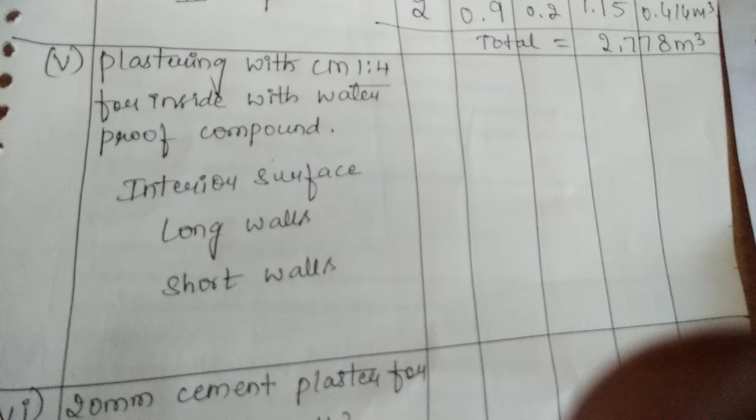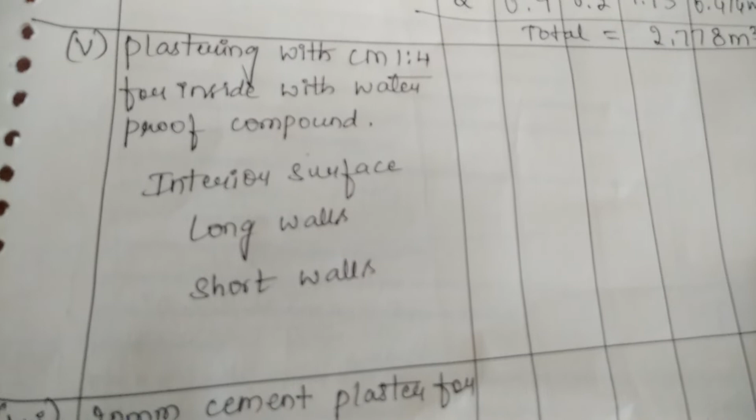Moving to the next item of work. The name is plastering with cement mortar 1:4 for inside with waterproof compound. Here we need to do the plastering for the inside portion of the tank.

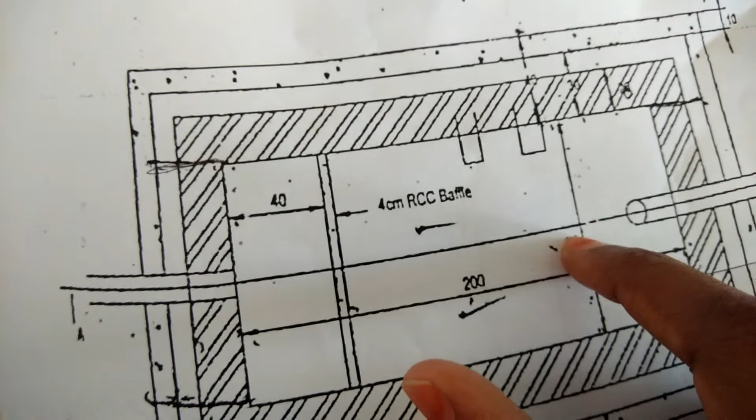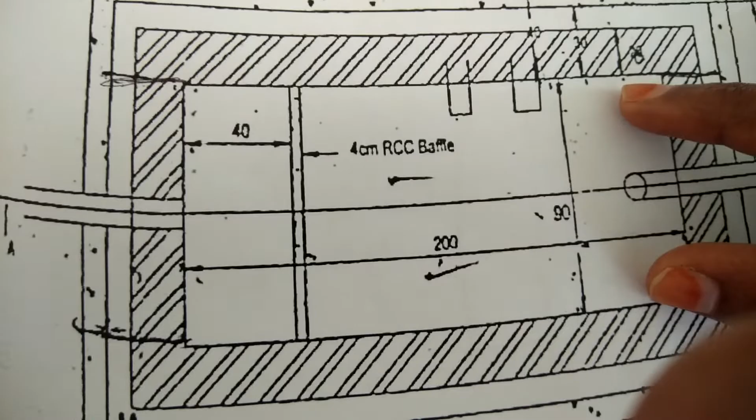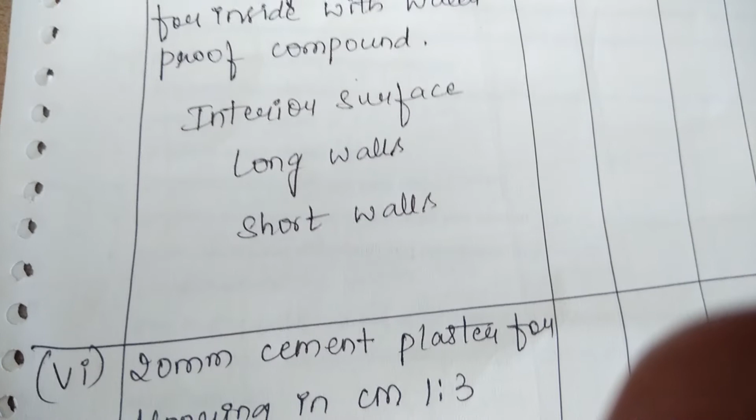The inside portion can be seen in the plan. The inside rectangle is where the plastering has to be done. This rectangle consists of two larger sides and two shorter sides. The horizontal portion represents the higher dimension, while the vertical portion represents the lower dimension. Hence the higher dimension wall is the long wall, and the shorter dimension wall is the short wall. There are two long walls in the horizontal direction.

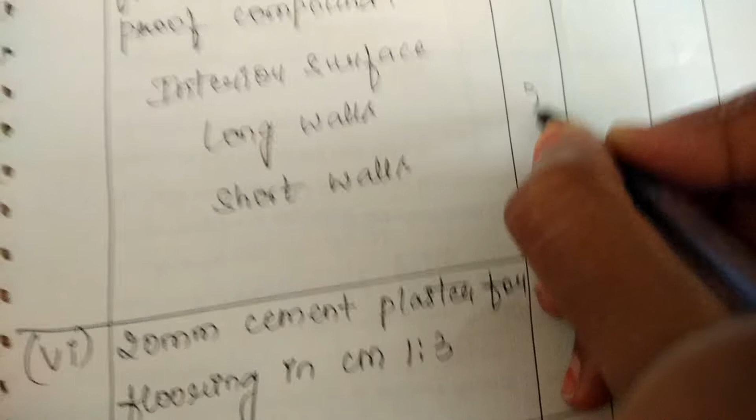Let us write the number as 2. Similarly, there are two vertical walls acting in the vertical direction, which are of shorter dimension. Hence you write the number of short walls as 2.

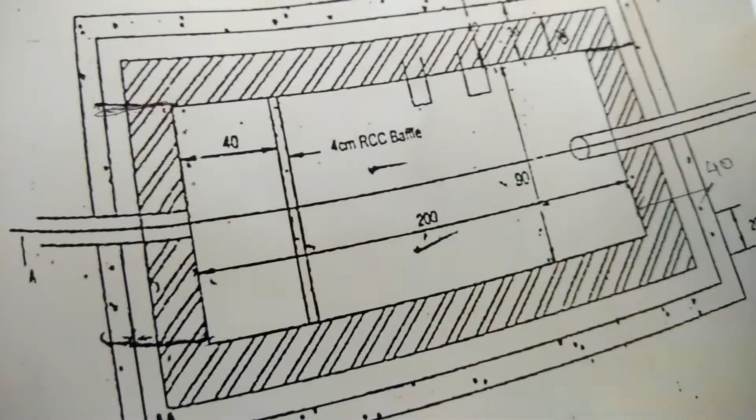Then to find the length of the long wall, since we are working on the inner surface, the inner dimension itself becomes the length. The inner dimension is 200 centimeters in the horizontal direction, so this becomes the length for the long wall, that is 2 meters.

For the short wall, the inner dimension becomes the length. The dimension is 90 centimeters. Dividing 90 by 100 gives 0.9. So the length of the short wall in meters is 0.9.

Then let us write the width. Here width represents the thickness of the plastering. Since there is a very small thickness for the plastering portion, the width of the wall will not be considered. We only do the plastering for the length and the height of the wall.

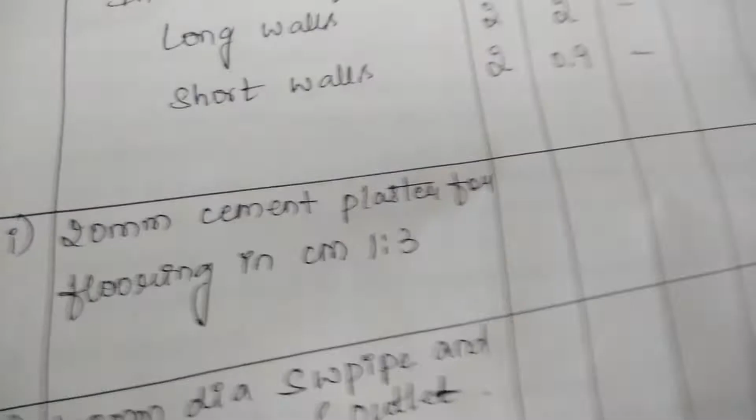Now let us find the height. The height of the wall is up to this point. The total height is 30 plus 140. Adding 30 with 140 gives a value of 170 centimeters. Dividing 170 by 100 gives 1.7. For both walls, the height is the same, that is 1.7 meters.

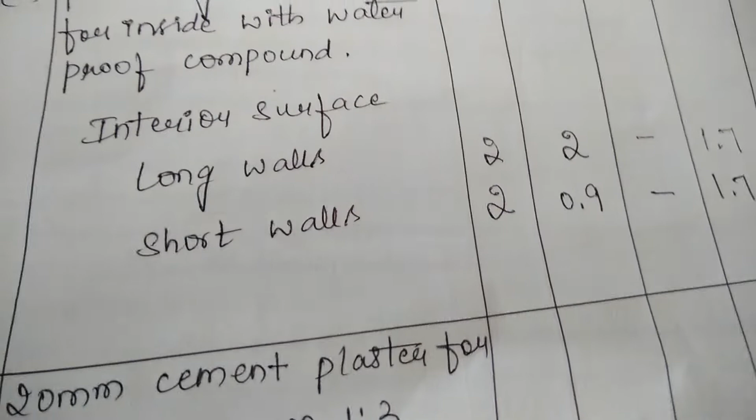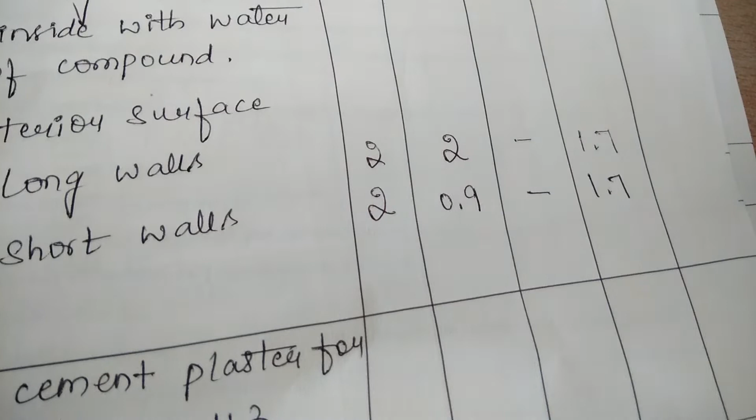Now this gives you all the dimensions. To find the final quantity, multiply the first three values. Multiplying 2 with 2 with 1.7, I get a value of 6.8. That gives the quantity for the long wall.

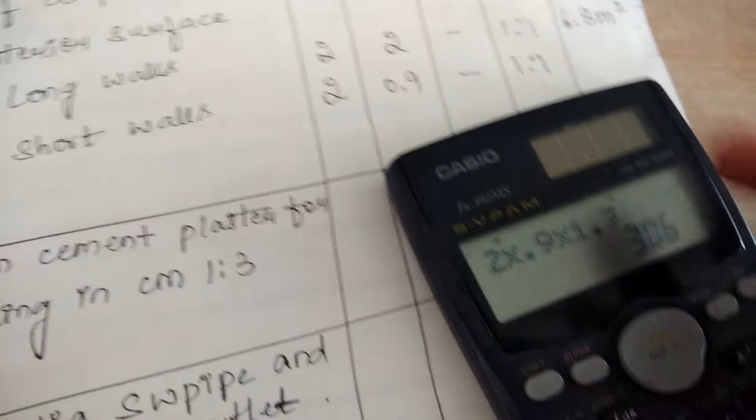Then to find the quantity for the short wall, multiply the second set of three values: 2 into 0.9 into 1.7. Multiplying these gives 3.06, expressed in meter square. So now I got the quantity for the short wall.

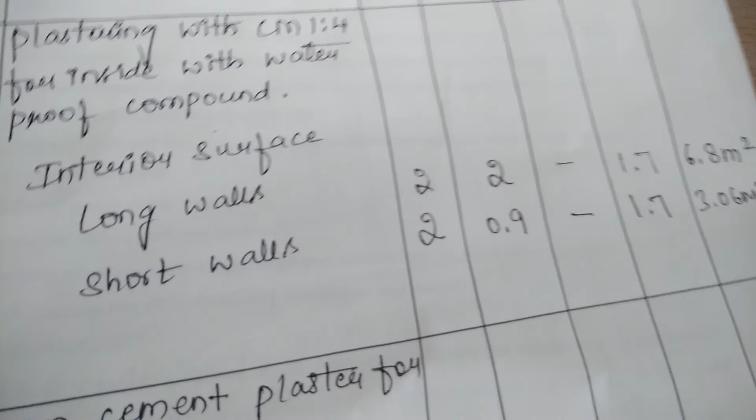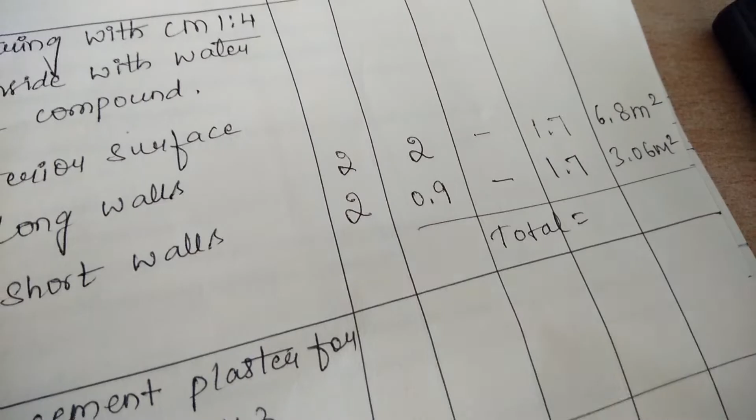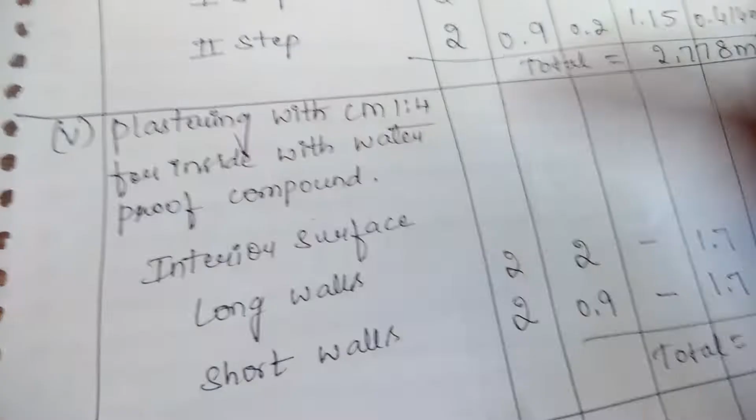Once I have both quantities, to find the final quantity I need to add them. Adding 6.8 with 3.06 gives a value of 9.86. So 9.86 meter square gives the final quantity for the plastering with cement mortar 1:4. That completes the fifth item of work.

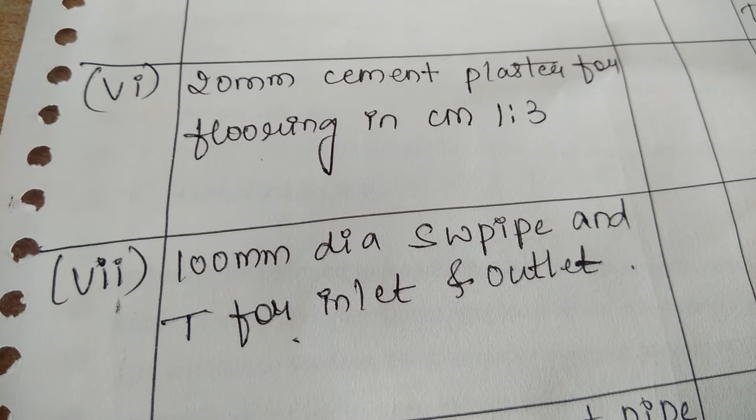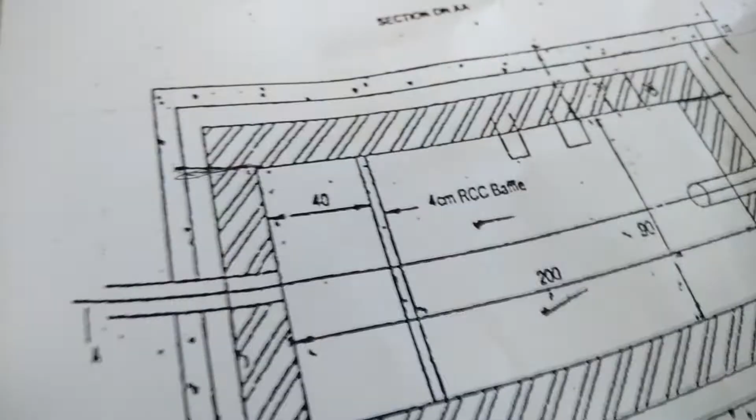Now moving to the next, the sixth work is 20 mm cement plastering for the flooring in cement mortar 1:3. Here the plastering has to be done for the floor, meaning we consider the inner rectangle. This will become the length and this side will become the width.

There is no depth within the floor because the floor thickness is very small. Hence we only get the length and the width. The length will be the higher dimension and the width the lower dimension. The higher dimension is 200 centimeters, which becomes the length of the flooring, that is 2 meters.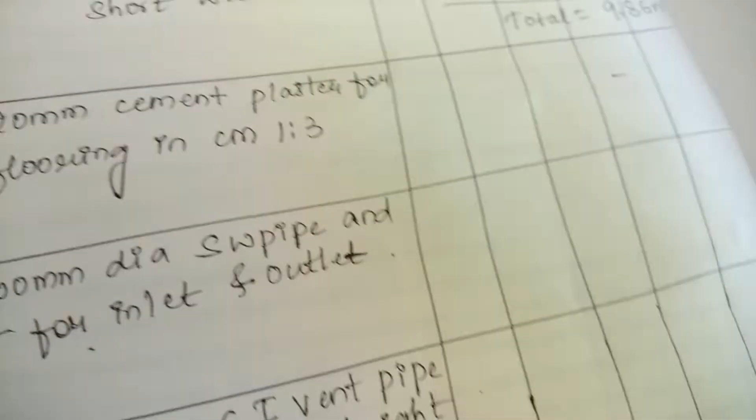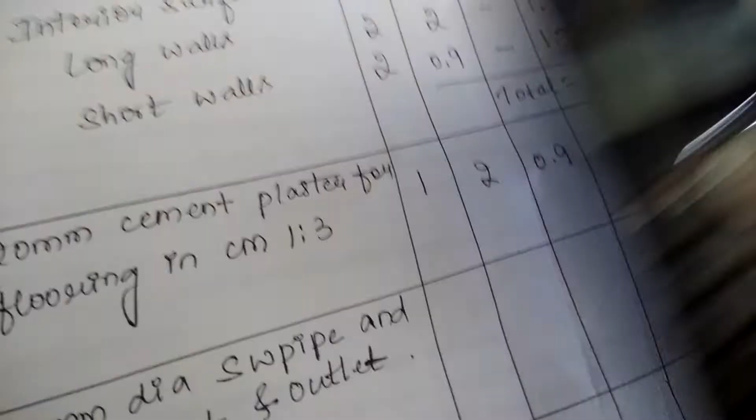Then the lower dimension is 90 centimeters, the inner dimension. Converting 90 to meters gives 0.9. Since we are considering the whole portion as a single unit, the number is treated as 1. Multiplying 1 into 2 into 0.9 gives 1.8. So 1.8 meter square gives the final quantity for the cement plastering of the flooring portion.

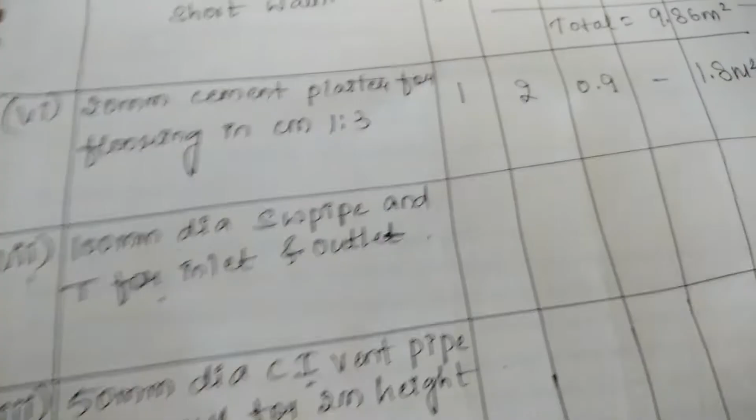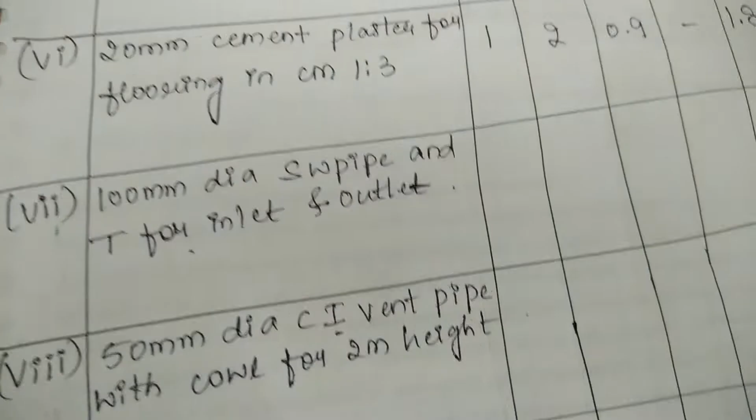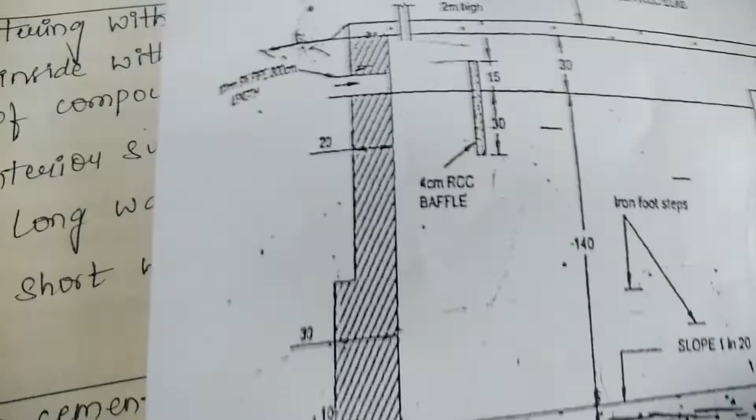For the seventh item of work, you need the 100 mm dia SW pipe and T for inlet and outlet, meaning how many pipes are needed for this septic tank. This is the inlet portion and this is the outlet portion along the T section. The same pipe used for the inlet goes to the outlet portion, so you only get one number of pipe.

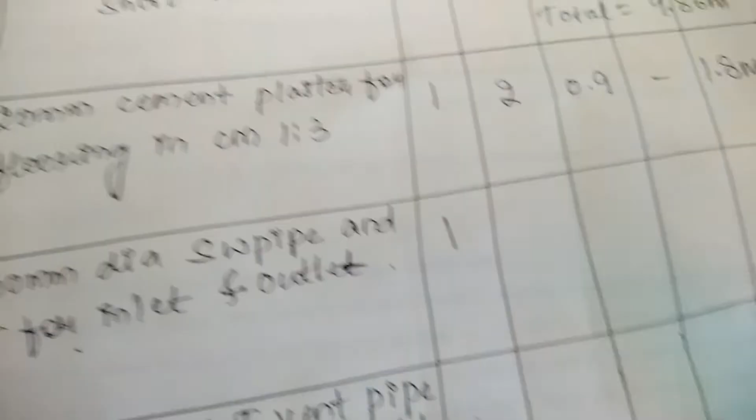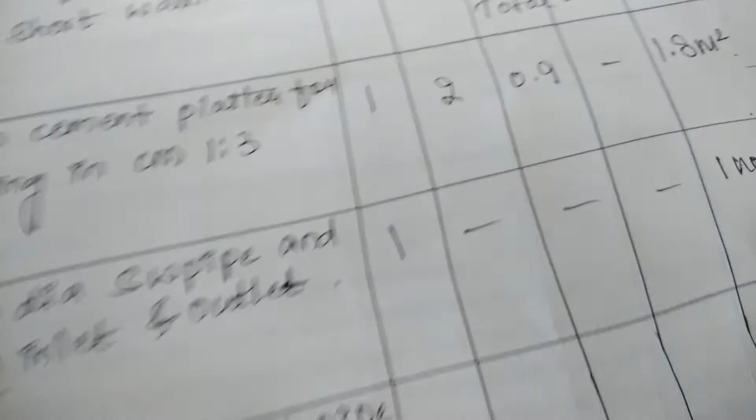We won't consider the diameter, and we will not get length, width, or depth. We only get the quantity in terms of numbers. So the final value is 1, expressed in terms of numbers. Pipe will always be expressed in terms of numbers.

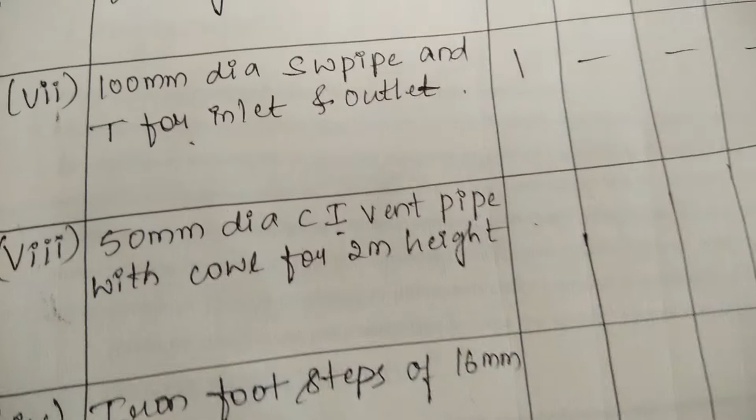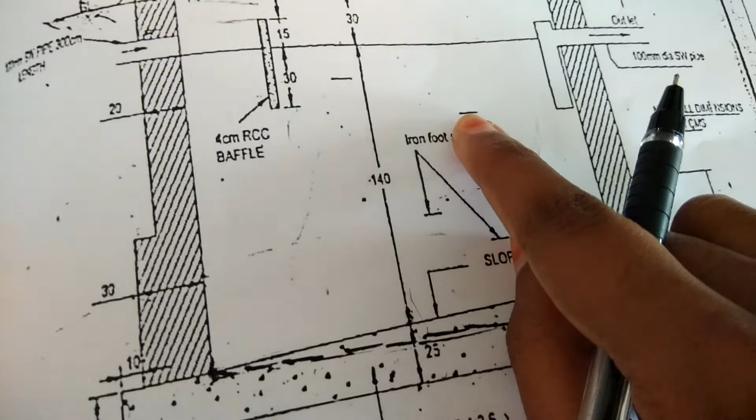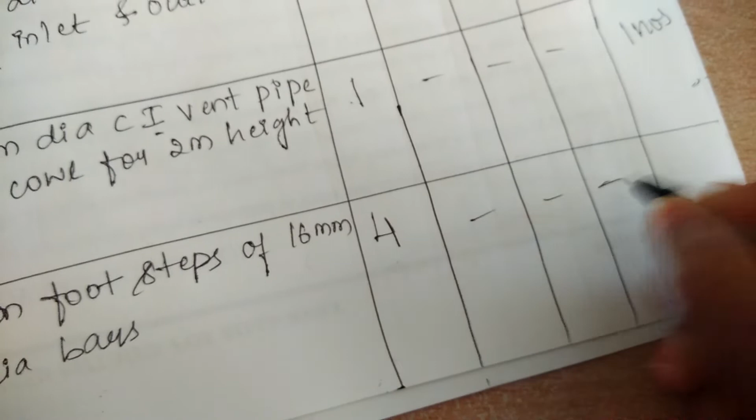Moving to the last quantity, iron footsteps of 16 mm dia bars. You have to count how many footsteps are provided within the septic tank. This horizontal line represents the iron foot. Count how many of these lines you have: 1, 2, 3, 4. So within the figure there are 4 footsteps total. Hence the number is 4. This quantity is always calculated in terms of numbers. Hence the final quantity is 4 numbers.

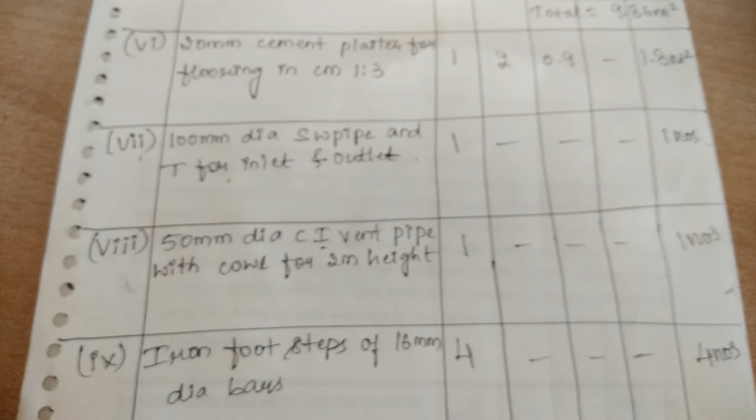This completes all the items of work given in the question, and that completes the detailed estimate.